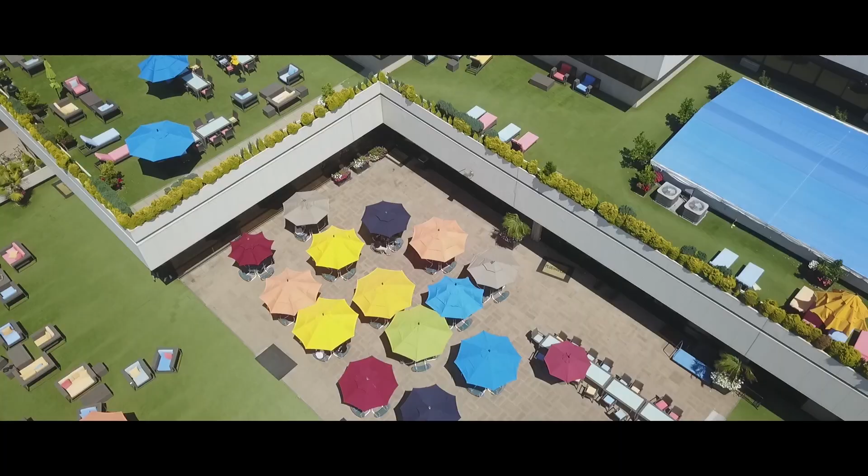All right, ladies and gentlemen, welcome to our Semiconductor Deep Tech Day. This is our second official semiconductor event here in our Silicon Valley office, after we started our semiconductor initiatives. Last time, in mid-March, we had Semiconductor Innovation Day, so I'm seeing so many familiar faces. My name is Ruzbe, and I'm leading semiconductor initiatives within Plug and Play, and it's really a pleasure seeing you, familiar faces as well as new faces.

This time, we are not just having startups. We have the pleasure of co-hosting our event with CEA and CEA Leti, and they are bringing their latest R&D technologies, as you can see around the room. So it's a great opportunity to know what's going to be the next generation of semiconductor R&D.

Just quickly going over the agenda - I know we are a bit behind schedule, but it's going to be fine. We are starting with a few minutes of introduction. We have a great keynote speaker, then we are going to our deep tech buckets. Each of these deep tech buckets includes an R&D presentation from CEA and CEA experts, then we are going to have some startups presenting on the same topics. And for each of them separately, we are having a great fireside chat in between the two deep tech buckets.

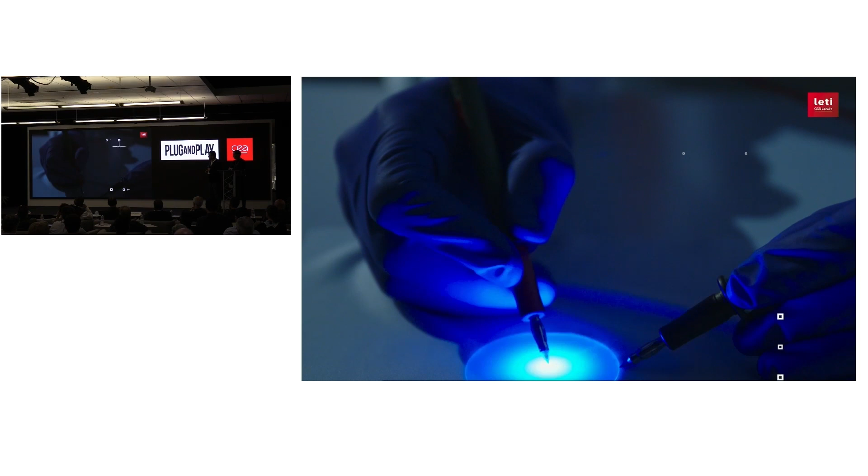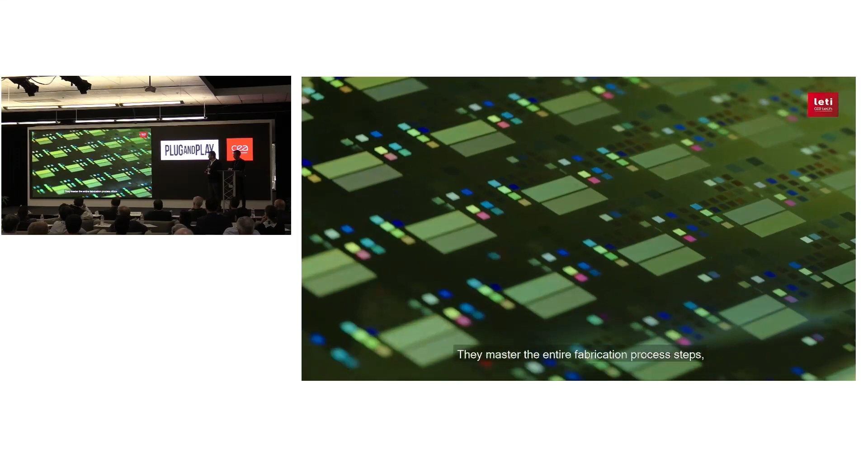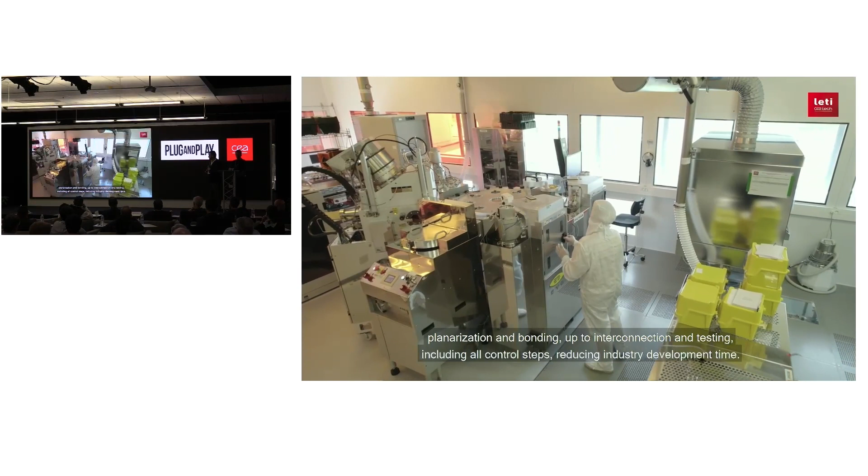CEA Leti experts leverage a full range of materials using 100mm up to 300mm silicon wafers. They master the entire fabrication process steps, from wafer processing, deposition, photolithography, etching, planarization, and bonding, up to interconnection and testing, including all control steps, reducing industry development time.

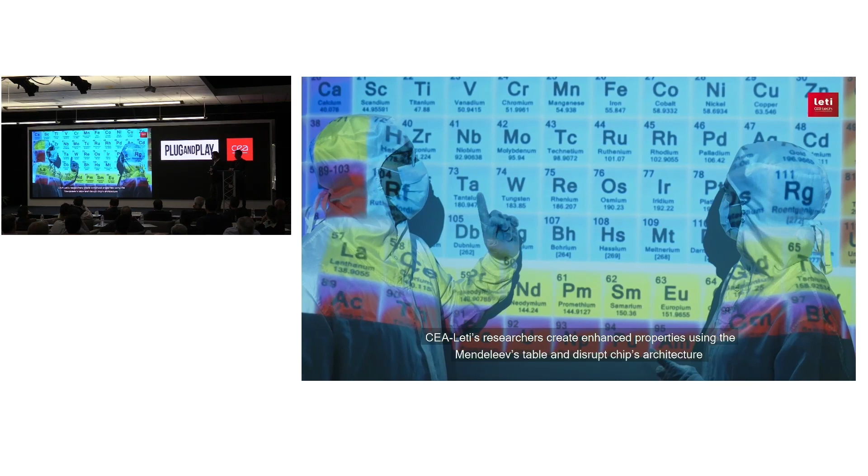CEA Leti's researchers create enhanced properties using the Mendeleev's table and disrupt chip architecture to offer unprecedented value in terms of miniaturization, energy consumption, speed, and frequency.

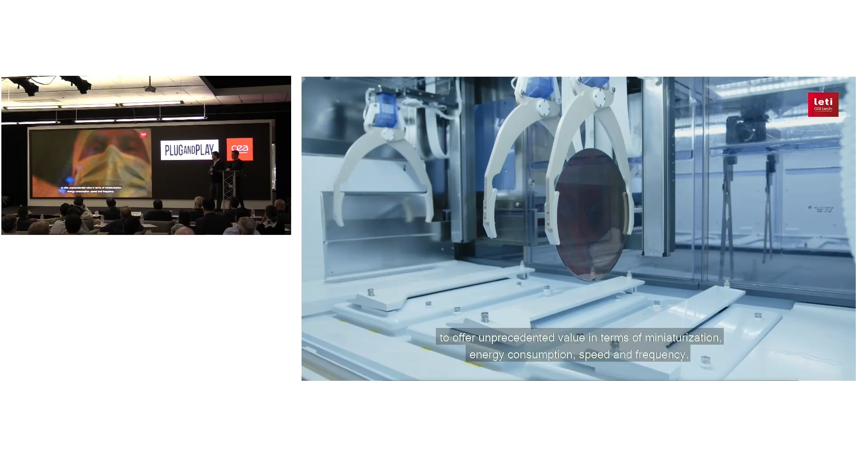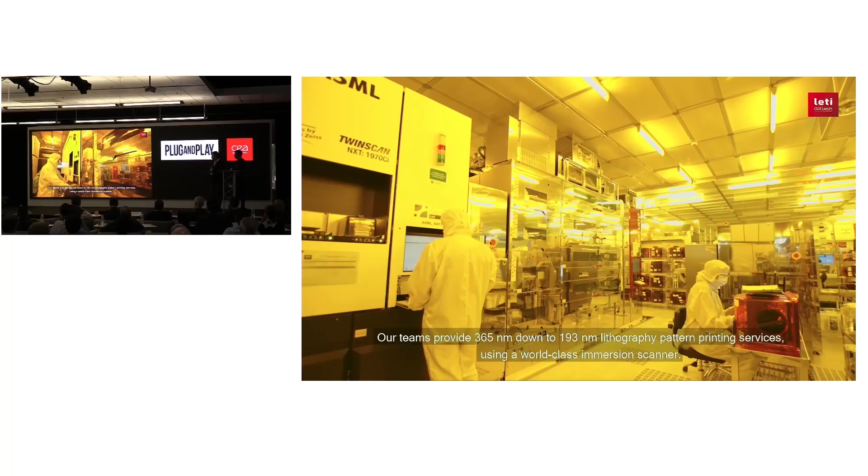Our teams provide 365 nanometer down to 193 nanometer lithography pattern printing services using a world-class immersion scanner. This equipment handles CEA Leti's partners' ever more complex pattern shapes and innovative material mix to achieve ultimate resolution and cut manufacturing costs.

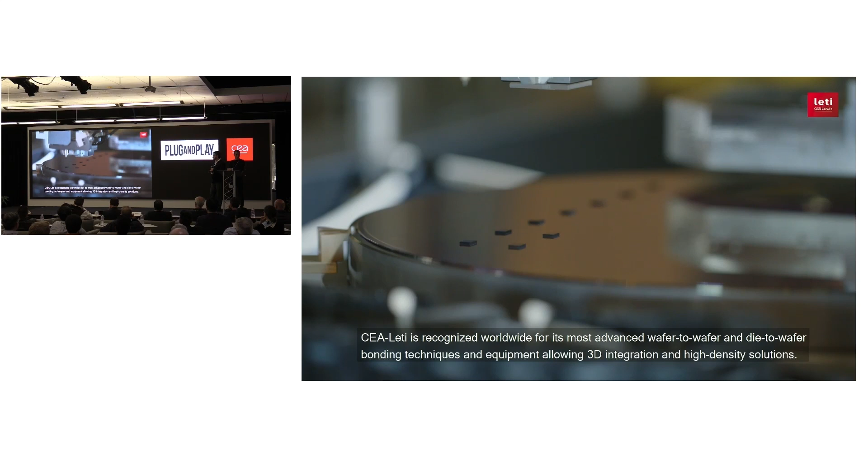CEA Leti is recognized worldwide for its most advanced wafer-to-wafer and die-to-wafer bonding techniques and equipment, allowing 3D integration and high-density solutions.

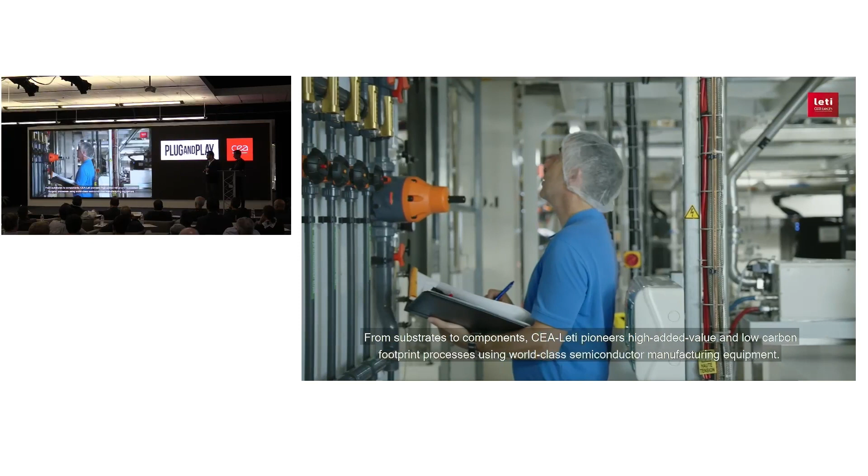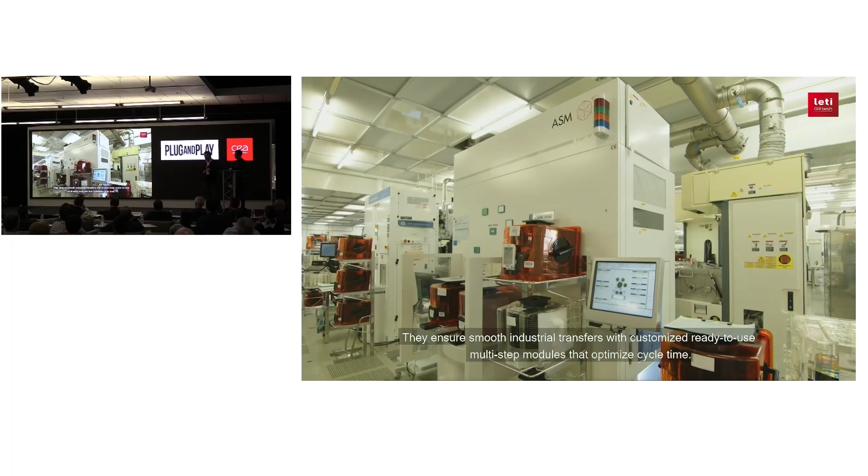From substrates to components, CEA Leti pioneers high added value and low carbon footprint processes using world-class semiconductor manufacturing equipment. To improve equipment's performance, our teams work hand in hand with suppliers. They ensure smooth industrial transfers with customized ready-to-use multi-step modules that optimize cycle time.

CEA Leti continues to install new equipment every year.

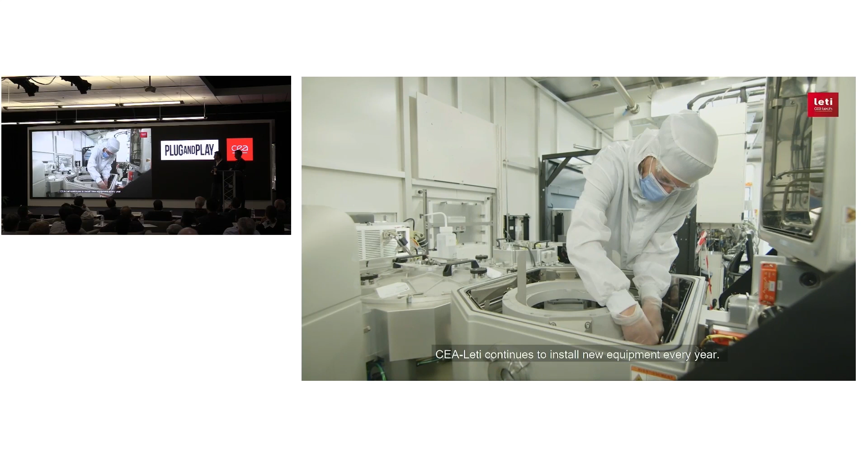CEA Leti builds on its scientific excellence to push the limits of miniaturization, leveraging both FD-SOI and gate-all-around technologies. Whether you are looking for computing, power electronics, sensing technologies, or radio frequencies, imagers, and display functions, CEA Leti delivers competitive solutions at various fabrication stages that meet industry high-volume manufacturing lines.

CEA Leti's teams turn ideas into disruptive products. Partner with us to fast-track your innovation project.

I just want to point out that when you use your smartphone, inside your smartphone, you have Leti inside, CEA Leti inside. 100% of your smartphones are based on RF-SOI, that's Leti. When you use your smartphone, your image sensors, there is Leti behind. When you use your smartphone with power management, this is again Leti. When you use an accelerometer in your smartphone, it's based on CEA Leti. So maybe you didn't know, but now you know that.

So do not hesitate to take time to discuss with the experts. And the first point, we have our huge event, our annual technical review, in Grenoble—I will say the French Silicon Valley—near our partners in Grenoble with ST, Soitec, and very soon with GF. So we have our annual review, so you are welcome the last day of June. So thanks a lot.

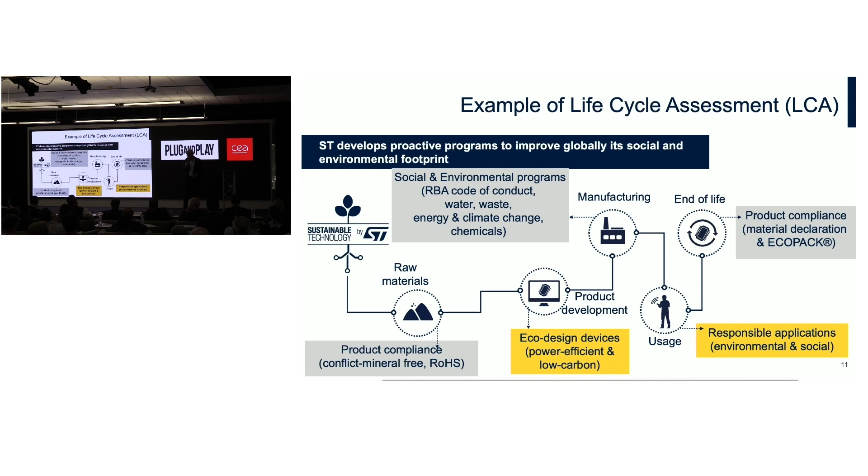Manufacturing side, again, it's about the electricity we consume, it's about the water we use, the raw materials that we use, where we're sourcing. But then we look at when we're putting something out, how is that used? How is it helping us in sustainability?

In energy consumption, 50% of the energy that we consume is industrial-based. The factories that we use to produce everything, it's a big consumer of electricity. If we can improve the efficiency there, it makes a big impact. And so that's why we're focused on this initiative.

So I want to talk about two areas that are quite simple but do have an impact. The first one is on electric motors. 70% of all industrial electrical energy is used to power electric motors. So of that 50% energy consumption, 70% is driving motors. We work on variable speed drives to improve the efficiency of motors, and that can create an improved use of energy savings.

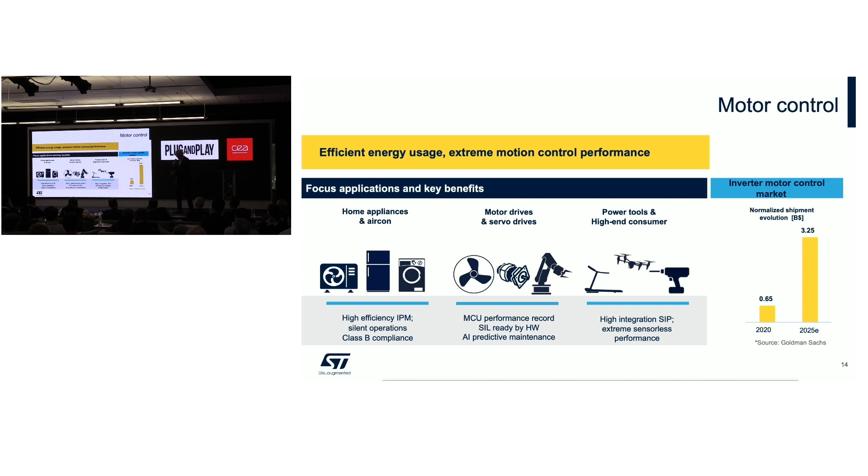Motors go into everything we have: home appliances, power tools, robotics, and you can see the market is growing rapidly in this space. Motor control, motor drives, growing rapidly. So if we can enable products in these applications, we're doing good for the environment.

One other area which is interesting is in power tools. In 2023, the forecast for power tools is 800 million units. Seems pretty large. Of those, professional use on tools is probably more than half. So we're looking at installing a MEMS unit that would improve the kickback on a drill. That kickback would then create energy saving. So we're looking in that, and basically in this application, if we were to work on just power drills, again, 360 tons of CO2 in 1 year. Small drop in the bucket, but if we think this way, I think we're going to make a big impact.

So semiconductors has an important role to play. ST is focused on smart mobility, power and energy, connected IoT. We're working on an efficient manufacturing footprint, but more important, we're powering our customers for sustainable innovation. So with that, thank you.

We can do questions. Please, Saeed. What is the biggest challenge you're working on? So the biggest challenge is the biggest market, or the biggest opportunity is always the biggest challenge.

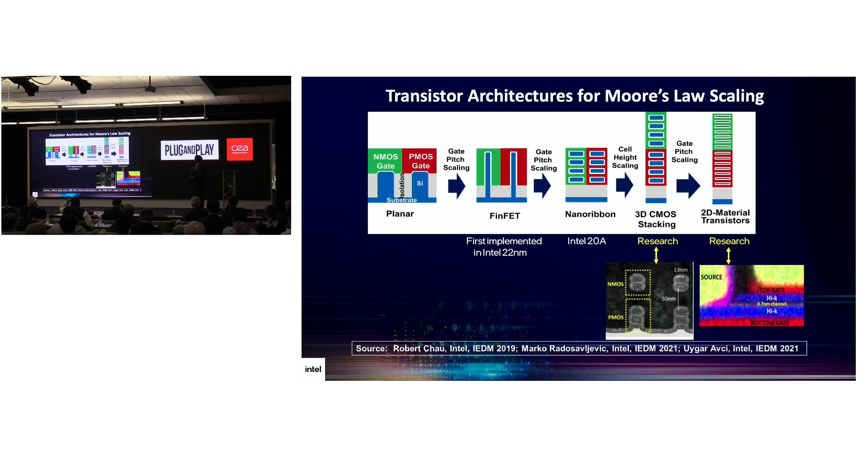We're also going beyond that, to fundamentally change from a silicon-based transistor to novel 2D-like materials. This is actually a presentation given by Robert at IEDM a couple of years ago, talking about some of the work we're doing in this area. That's on the front end - the transistor side.

On the packaging side, packaging is right now going through a huge inflection - I heard 100 different suppliers, thousands of different products - there's a big revolution going on. Some people call it chiplets, some call it 3D integration, heterogeneous integration, and the concept is instead of trying to make everything on a single chip, can I source it from many different companies, many different IPs, but eventually package them so they work as one monolithic chip. There are different ways to do it, and I'll talk about some programs we're working on with Leti on this front.

The holy grail is, can you actually do this in a commercially viable way? Because Moore's law has always been about putting everything into one IP block or one chip. If you split them into many different chips, can you actually do it? But if you can, it opens up a plethora of opportunities that people hadn't thought about - you could combine devices like gallium nitride and silicon on the same stack, which is not possible today. You cannot just make them on the same monolithic stack.

So those are some examples - there are products available in the market. One of the first entrants to this 3D integration is the CMOS image sensor, which is in pretty much all of our phones, where they put a combination of CMOS image, DRAM, and a logic driver and integrate all of them to drive very high performance rather than trying to build them in a monolithic way.

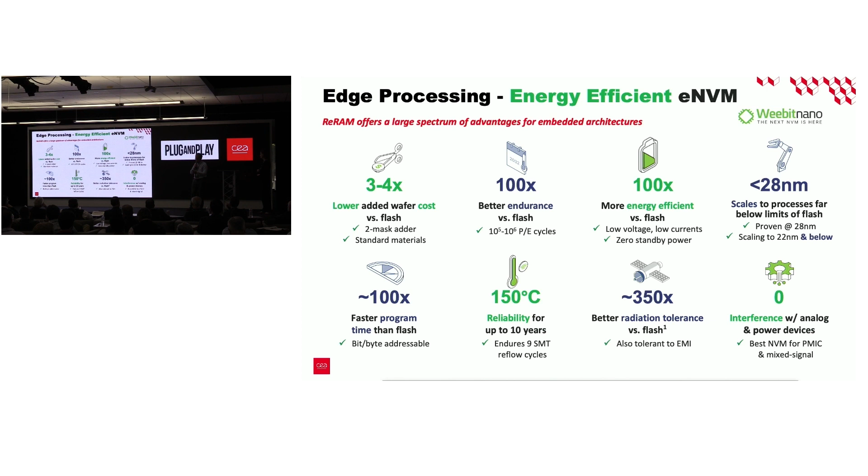Another topic I'd like to talk about, and François will explain much better than me, is this memory advanced demonstrator. This is a proof of concept platform we use at Leti for our internal development and research, because we're not only developing resistive RAM, but also PCM, ferroelectric RAM, and MRAM. This demonstrator integrates back-end-of-line non-volatile memory technologies on a classical, industrial CMOS-based wafer, which allows us and our partners to develop technologies and to prototype and make proof of concepts of their memory technologies.

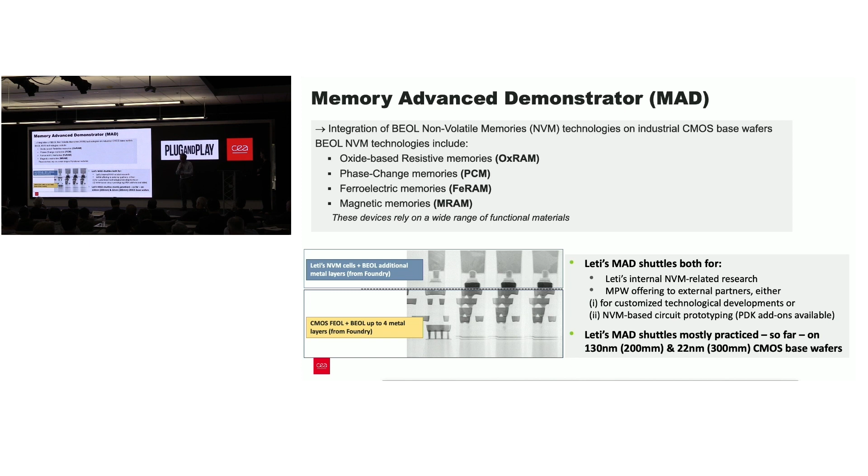Just to end with the memory topics, we have multidisciplinary teams in CEA, from device up to algorithms, and we put all that together in order to co-optimize design and technology. This is what we call DTCO, and we always have DTCO in mind when we develop our research.

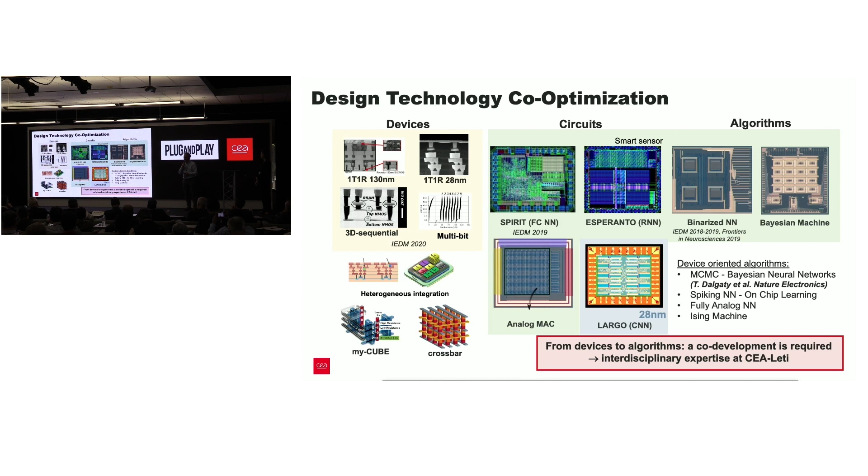Now I'll just talk a little about chiplets. If you want to learn more about chiplets, don't hesitate to go to my booth, on my left as well. I'll try to explain how chiplets can fill the gaps between the theoretical Moore's Law and the practical one, because with advanced technology nodes, we have difficulties shrinking some parts of the chip, like analog parts. Chiplets could be a good solution, replacing a monolithic die with several smaller dies called chiplets. I'll try to explain how it can ease time to market and cost-effective development, lowering manufacturing costs with really good flexibility.

According to a presentation done during the chiplet symposium here in January, chiplets could represent around 20% of the semiconductor market share in 2027. So that's something quite important now, especially in the HPC world, high performance computing.

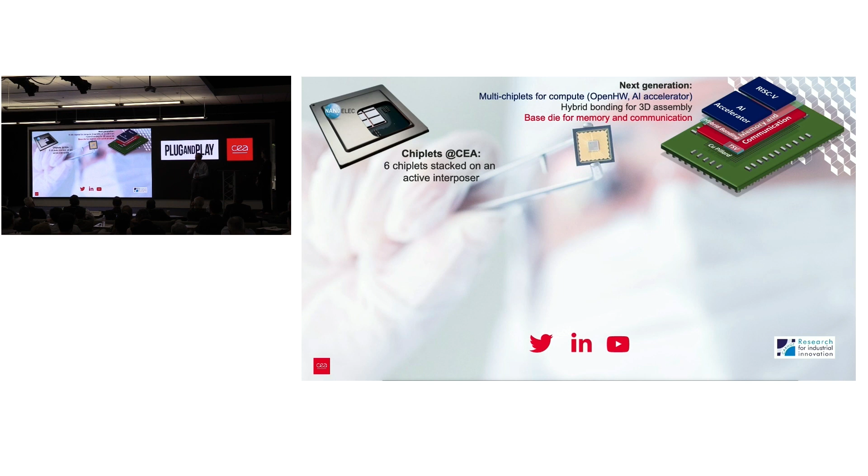I can give you more details on what we've done, the solution we've chosen for chiplet design, and our vision for the next generation, showing that we have a complete offer, as I said, for memory, from the system down to the technology. And always on my right, don't hesitate to visit the booth from Aurélie.

Without any 3D integration, we wouldn't have any chiplets. So it's really important to understand what we're developing in terms of 3D integration technology, from TSV to propagate signals from top to upper levels for routing, in order to find the different IOs, connecting and assembly, what we use in terms of connection between several tiers or layers of 3D integration, and everything related to rebuild and sealing.

And all these technologies is not just, let's say, a toolbox development.

This is also demonstrators. We also exercise this technology on demonstrators. We've made a first demonstrator called Intact. This is an active interposer on which we have stacked six chiplets. This demonstrator is now finished. So we have learned lots with these demonstrators on the technology side, but also on the design side.

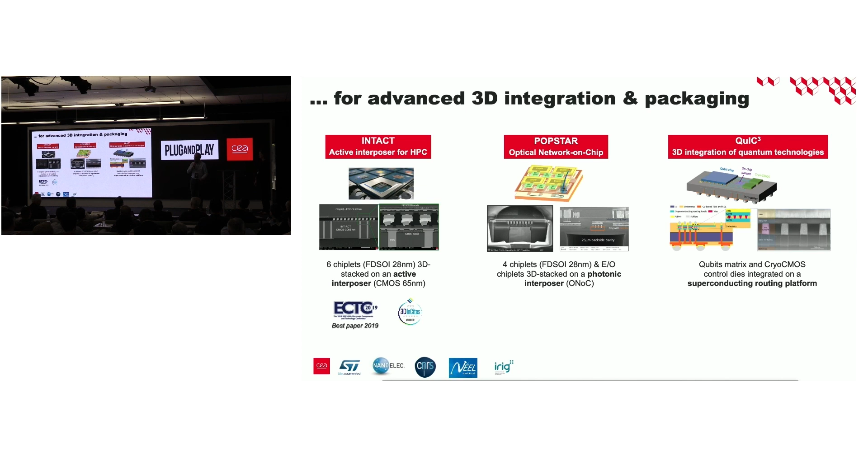So once again, don't hesitate to visit the booth on my right to learn more about all these technologies.

Thank you, Denis. I will follow up with another topic about data communications. Here I will introduce two sets of technologies: one around silicon photonics, and one around radio frequency technologies. The booths are in the corner, so do not hesitate to visit us. Eric for radio frequency and Hai for silicon photonics.

You, better than others, probably know how there is a huge demand for high-performance communications, large bandwidth, low latency, low power, because nowadays it's more and more important to have a look at the power consumption of our technologies.

So at CEA-Leti, as it was introduced just before, we have our own platforms for developing our innovative technologies. So we have one 12-inch platform for silicon photonics. This is a very state-of-the-art platform with immersion lithography, with a small CD going down to 60 nanometer.

And on this platform, we have different, really nice tools that we develop through joint collaborations with equipment manufacturers. So we have a set of possibilities, including nano-imprint lithography, grayscale lithography, and so the sky is almost our limit in terms of lithography.

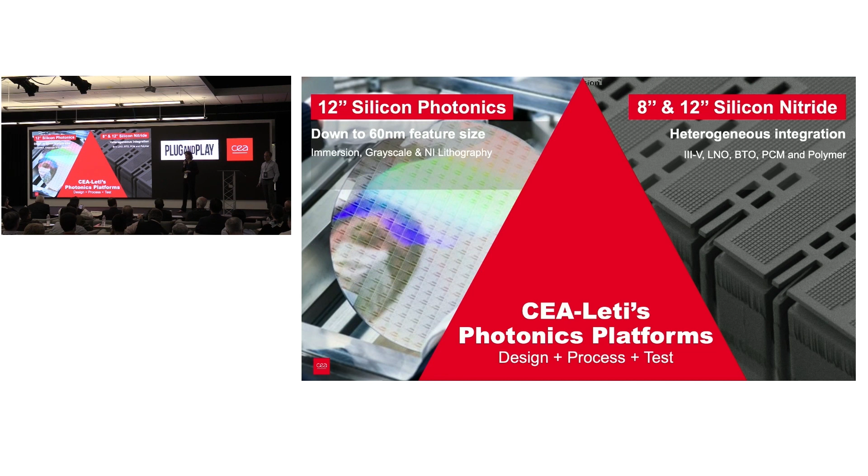But we don't stop when we have an idea and make the first prototypes. Our aim is really to transfer those innovations into the industry, to you, the startups, the big players.

And here we have an illustration of Scintil Photonics, a spin-off of CEA created 4 years ago. They have developed a very nice solution for datacom, based on III-V on silicon integration, to really integrate easily and in a scalable way lasers and modulators.

So they made a demonstration one month ago at OFC. Maybe you were at OFC and saw the demo. They showed their first generation of DFB laser array, 4 wavelengths combined on chip, with 100 gigahertz spacing.

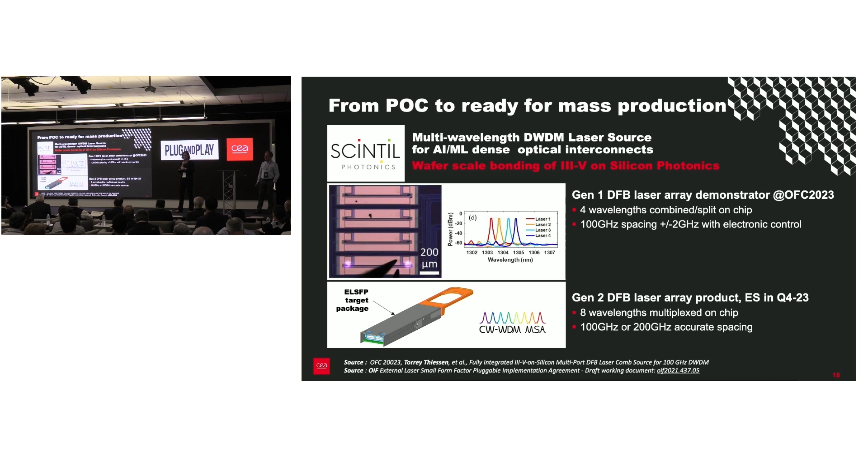And they have also shown their first DFB laser array product with 8 wavelengths. They showed the simulation, and it's now into production, into prototype pilot line these days. So it will be demoed at the end of the year.

And you had a brief overview before of the nice 3D technologies that we can use in our solutions. So for silicon photonics, we developed TSV, but for photonics - through silicon via for photonics - in order to enable this nice optical network on chip architecture.

This architecture is being finalized those days, based on chiplets from ST, 28 nanometer FDSOI, that are then packaged with an active silicon photonics interposer. As mentioned by Denis, it's very important to take into account from the beginning the co-design with the electronics. And so we have real demos ongoing to show you.

And last but not least, about developing solutions based on silicon photonics, you need also the right test equipment to measure the good performances of your solutions. So we have best-in-class testing equipment with more than 6 wafer probers in-house. This year we will have the ability to ramp to a bandwidth measurement up to 110 gigahertz. And next year we have equipment coming in for bit error rate and eye diagram measurement up to 128 gigabaud. So we have all the tools from design to prototyping to equipment to develop the latest innovative silicon photonics solutions.

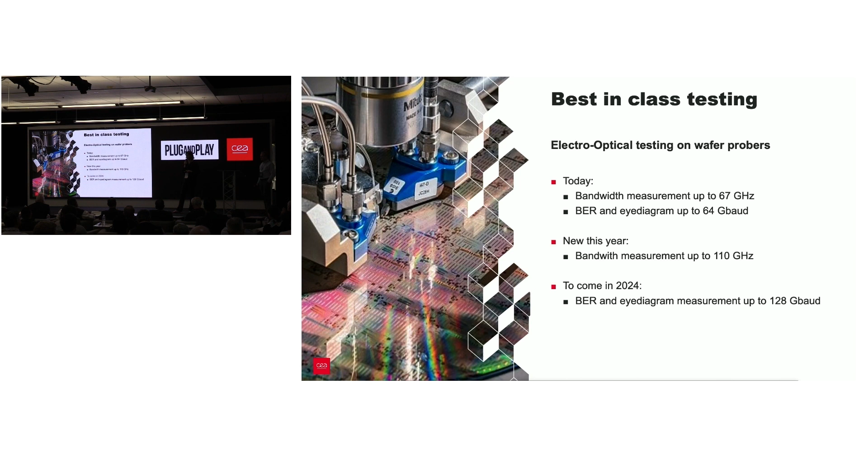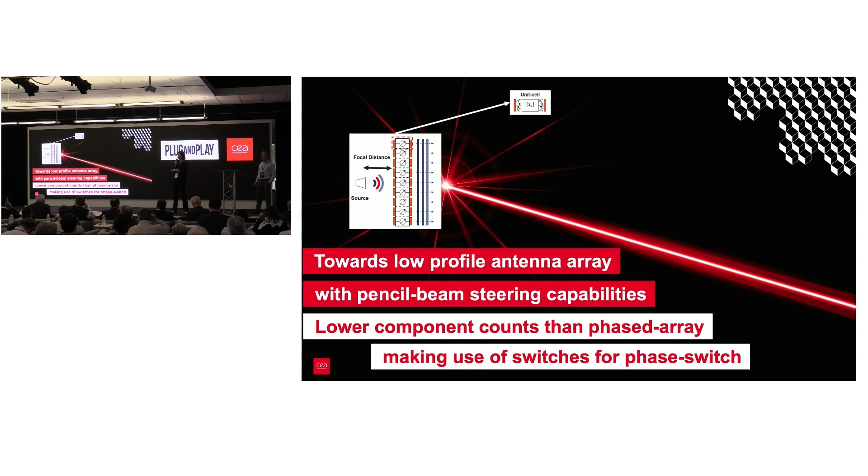Then you have a set of diodes, switches, low-cost components. So you have a very low-cost solution, and you have very good compactness in the solution. So you can come to our booth, see Eric, to have details on this lensed array.

Then you may need also point-to-point communications for the D band. Here we have developed a channel bonding-based solution, which is much better from our point of view than wideband solutions. So you can reach high data rates. Here you see an example of 8 channels. On the top it's 16 QAM, but on the bottom you see a 64 QAM configuration, and you have more than 10 gigabit per second per channel. So meaning for 16 channels you get more than 150 gigabit per second bandwidth. And this solution also has very low power consumption, as we reach only 20 picojoule per bit consumption.

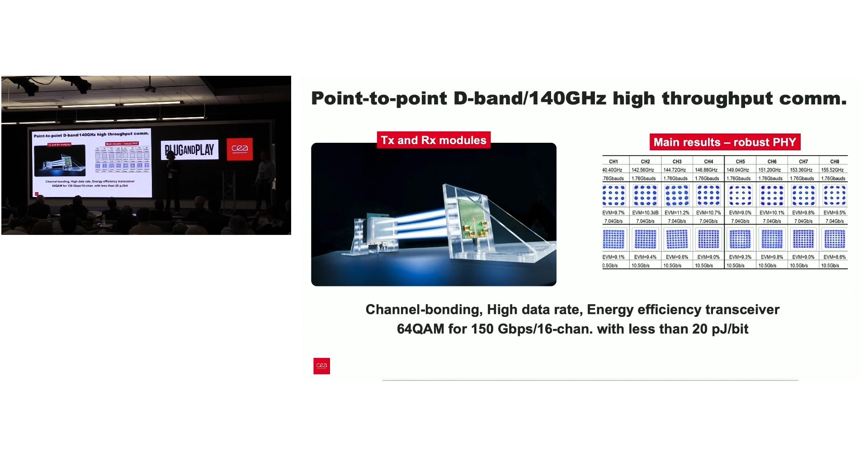So you have a demo on the booth. If you want to see it for real, come to the booth.

So this is a very powerful technology. And if you associate this technology together with GaN, you can have even higher power modules. So you have a complete set of materials available to reach frequency range 1 or FR2 range, with frequencies going up to 60 gigahertz, but we've even shown that it can reach 100 gigahertz. So it's a very efficient technology compared to GaAs in the sense of having more functionalities embedded into this RF-SOI technology.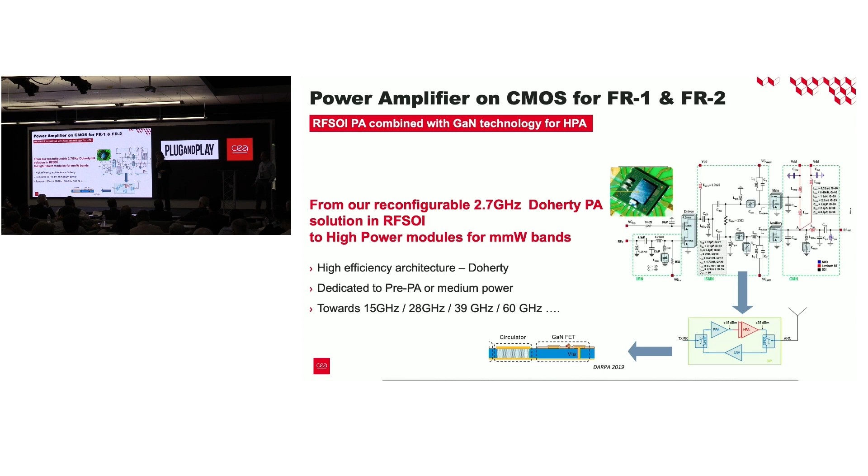To summarize, regarding radio frequencies, our aim at CEA is really to break the sub-terahertz frontiers. We have developed CMOS technologies that are off the shelf. You can come to see us. We can customize the solutions for your specific need, but we have solutions in hand already. So thank you for your attention.

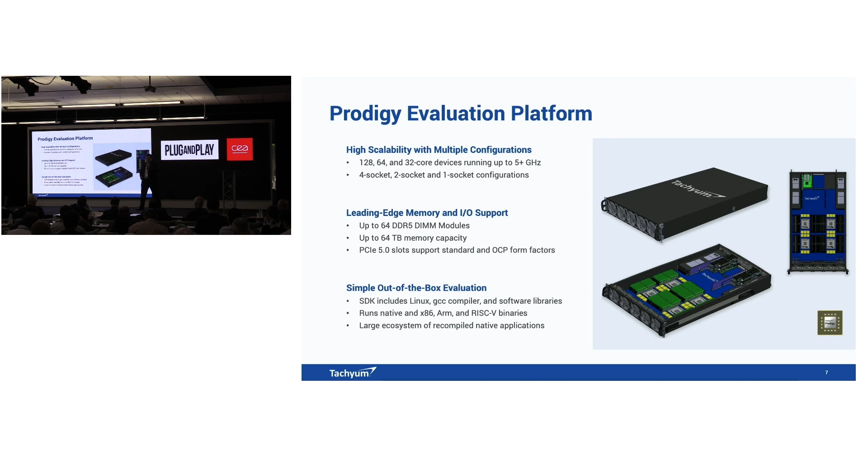Funding status: currently in the middle of raising Series C. I want to thank you for your time, and thanks to Plug and Play for the opportunity.

For presenting Tachyum. For the last startup in this section, we have Numem. Numem develops advanced non-volatile memory solutions based on MRAM. Their solution offers high density, low latency, and low power consumption, making it applicable for many applications, including edge devices and data centers. Please welcome Jack, one of our French entrepreneurs in residence, on the stage.

Thank you. Formerly French, yes. Hi, a lot of familiar faces in the audience. Good to see all of you, and thanks Plug and Play for the opportunity. We've been with Plug and Play since inception and been able to use a flexible model and events like this, as well as all the amenities. So appreciative of this opportunity.

As you've heard multiple times today, AI is a big driver revolutionizing everything, and clearly a huge market for semiconductors, north of $100 billion expected in 2028. What's important also is that it's not just a play at the data center, but more and more edge nodes are getting intelligence, driving to add intelligence into edge nodes at a faster pace than the edge nodes are growing, with an expectation of 2.6 billion units in 2025.

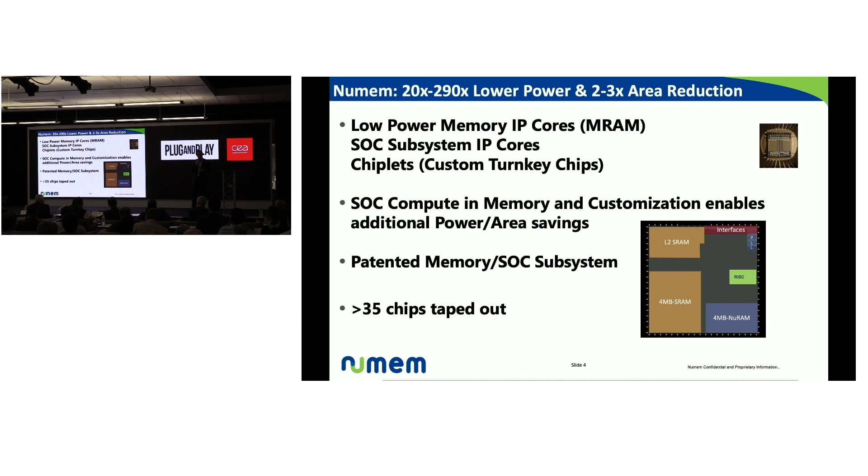We've taped out to date 35 different chip variants, so we have a lot of experience in getting chips out. Snapshot of our product: we have our memory array, which is based on MRAM, but we also have more and more SoC functions built in support of the memory or in support of compute.

For memory management and control, built-in self-tests, which can be adaptive. Performance and endurance engine - as you've seen earlier in a presentation, resistive RAMs have traditionally lower endurance, much lower than SRAM, and we're able, with a very small circuitry, to improve the endurance by over 100x, at the same time improving the average performance by about 5x.

And then we have compute functions, which are not intended to replace the entire AI accelerators, but as an assist, enabling a reduction of the data transfer between the memory and the SoC. So that's in a snapshot what we have inside our subsystem, but we are also now decoupling some of those functions that can work along with other memory IPs, in different flavors, be it RRAM, PCRAM, or even FERAM.

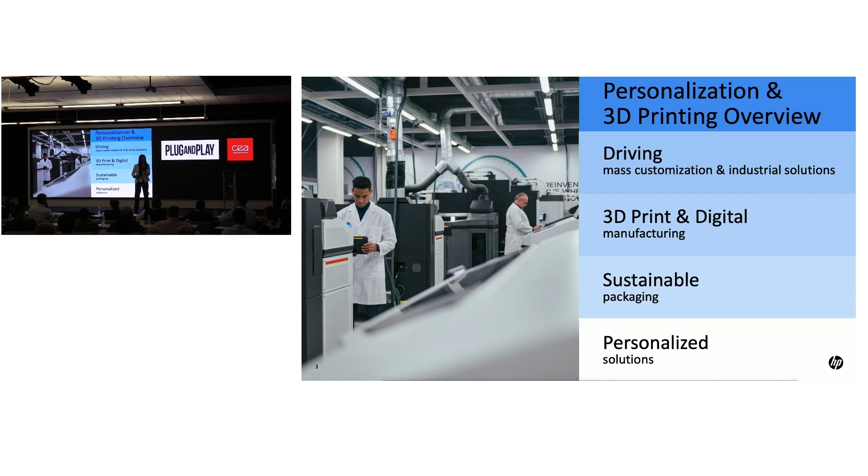And obviously 3D printing - one of the biggest advantages is making personalization happen. A great example, I think a lot of people know, is dentistry - the clear aligner to correct our teeth, right? That is solely built and based on 3D printing because every single treatment is different.

So here are some of the portfolios we have, and we definitely had a lot of work going through this. But this is our current portfolio - it's called Multi-Jet Fusion technology with our polymers, and of course Metal Jet for making metal devices.

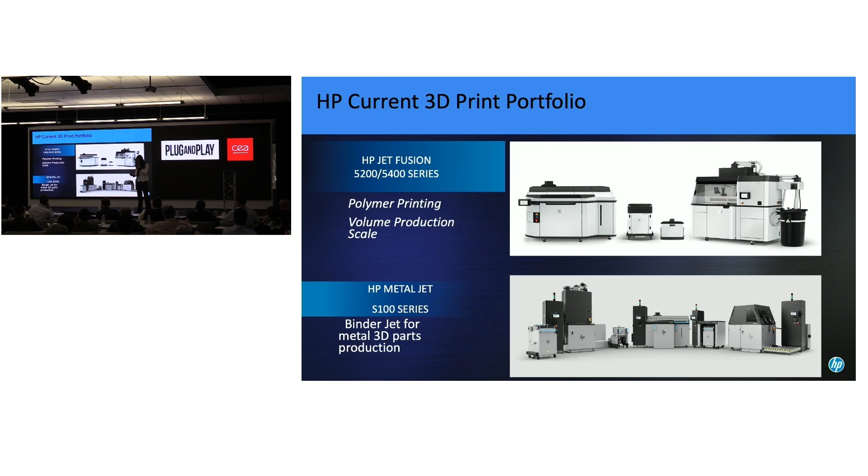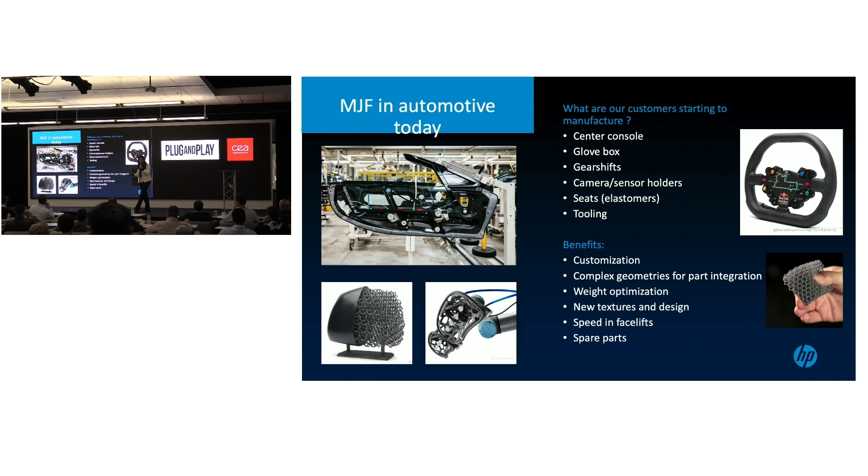So one of the things is, where are these things being used, right? Examples are, I just gave dentistry, and these are even in automotive. Today many devices have started utilizing this technology to build customized and personalized devices in vehicles.

As we continued working on this, we had a question - particularly for us, is that today we're making all these devices as static ones. Can we integrate functions from the get-go? So we had this question in our mind.

Can we actually integrate those sensors and electronic devices from the get-go? Similar to robotics, a lot of these are starting to have - and one of the problems we keep hearing - is lots of wires going everywhere, right? So how can we actually have those devices made from the get-go with limited wires?

With all these questions in mind, this is where we actually started talking to CEA back in 2017, okay? A couple of challenges we learned - all current prototyping and manufacturing processes for electrical, mechanical devices or assemblies have inherent design limitations that prevent engineers from exploring the full 3D space.

Antenna is one example, which we learned a lot about from CEA in the earlier days. And also, this is an interesting quote - our engineers are used to working in 3D, but not our electrical teams. This will be a new way of designing. These are the challenges, and at the same time, also opportunities.

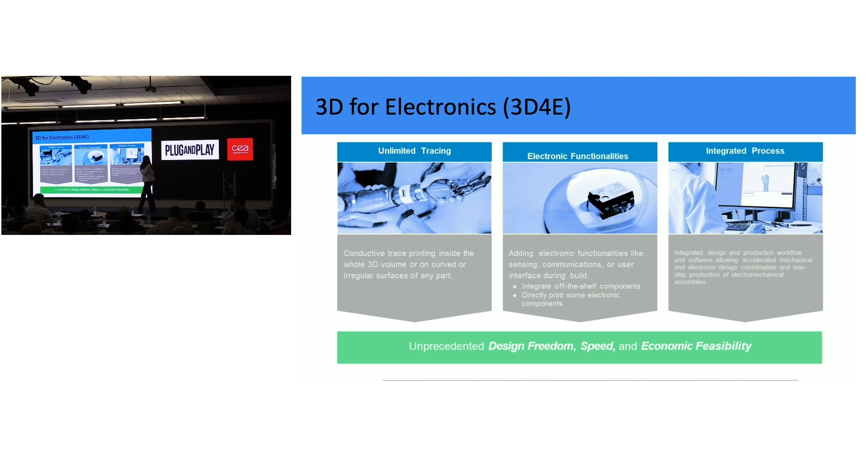That's one of the questions that gives us the opportunity to leverage 3D space from the get-go. And of course, electronic functionalities - can we integrate sensors and communication devices into user interfaces? One of the things we talk about is not only building those devices from scratch, but integrating them in 3D, which is also a big challenge. And what would the integrated process look like?

So when we look at this, what is the underlying technology? We basically created a general multi-jet fusion technology, the powder-based one. We put in not only plastic or polymer materials, but electronic agents to help us build those electronic functions.

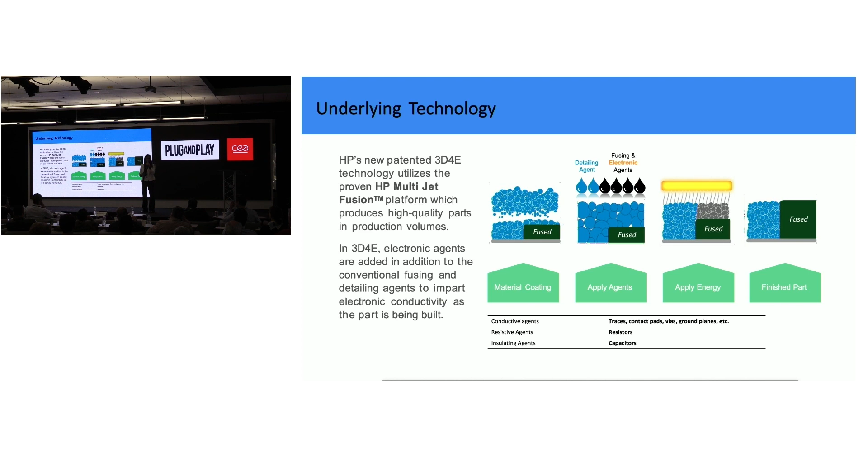At the early stage, we worked with CEA to build this up to proof of concept. This is very important - it's easy to have hundreds of different ideas, but this is where we can really start to benefit and build.

One of the things we worked on is these unique application devices. The middle one really came during the early pandemic time - combining sensing and communication, we print 2.5D and 3D antennas inside these parts, and we place the chips and sensors. Later stage, we built an air pressure sensor device.

That went into ventilator systems. And of course the other part is how fine a feature we can actually continue building into the devices - this is one of the integrated electromechanical devices.

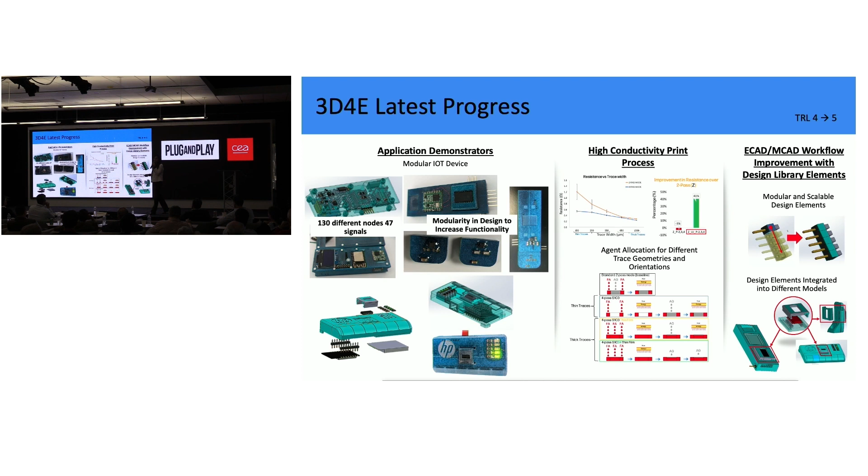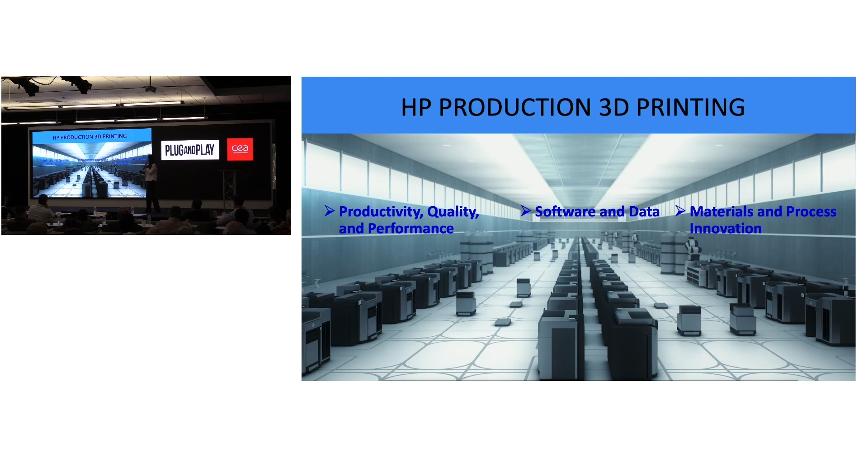Last but not least is this workflow - ECAD and MCAD, how they actually integrate and work together. For 3D to really make a difference in this field, it's very important to understand this is not a one-step, two-step process. Productivity, quality, performance, software and data, materials and process innovation all need to continue happening.

This is really just the dream we're building toward - it's not there yet today. Across all these fields, we continue working with CEA as our key collaborators. The most recent work is on digital twins to improve our productivity.

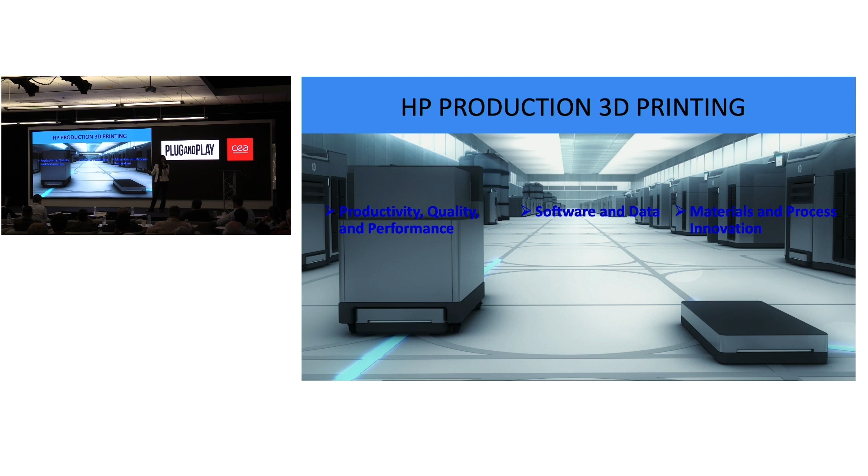Of course, materials innovation has always been front and center for all technology to move forward. With that, thank you very much.

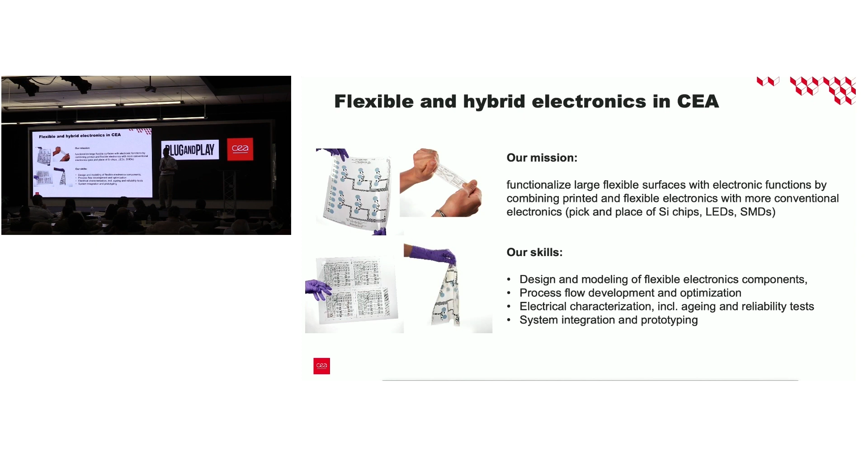This happens in a clean room, the same kind of clean room where you would do microelectronics. The typical substrate is a square format, not a round object. Its size is comparable to a 300 millimeter wafer, and it involves the usual equipment for printing and coating, thermoforming to get the shapes, and back-end equipment.

The nice thing is the substrate can be pretty much anything—glass, metal, stretchable plastic, paper. Paper is a very interesting substrate, enabling environmentally friendly devices.

So what we've done so far is a large portfolio of printed devices, ranging from very simple systems at the beginning—capacitive touchscreen, conductive tracks. The obvious case, for example in a car, is when you need to lay out traces of a signal on a bumper.

Antennas, of course, all kinds of electrodes, which are nice because when you want to connect with the human body, you don't want a flat, solid electrode—you want something conformable. Also measuring units: strain gauge, pressure sensor, humidity and temperature sensor.

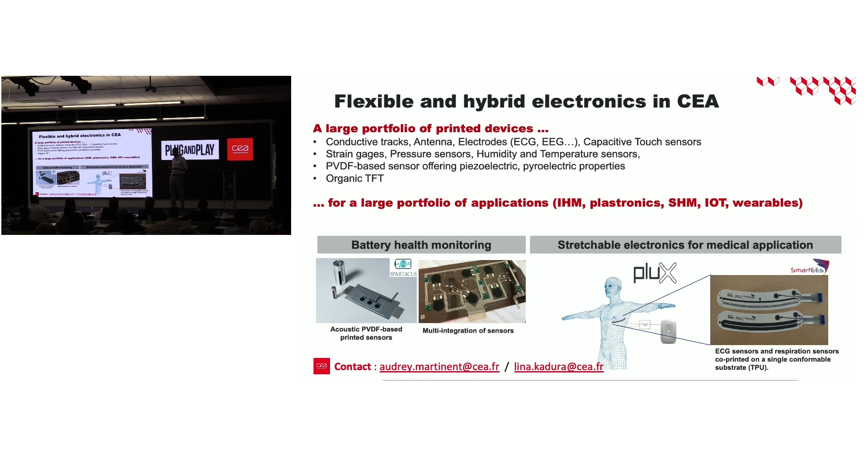Let me end this series of presentations with another type of sensor, the one we call MEMS and NEMS. These are actually closer to the world of the silicon chip. Leti has been one of the pioneers of MEMS and NEMS since the 1980s, and we haven't stopped investing in MEMS since then. We have a number of world firsts in the MEMS world, and I'm going to give you some examples.

Historically speaking, it started in 1980. The first mass market MEMS was the capacitive comb-driven detection invented by Leti—a capacitive sensor. The way you measure the physical phenomenon you want to measure is through a change in capacitance.

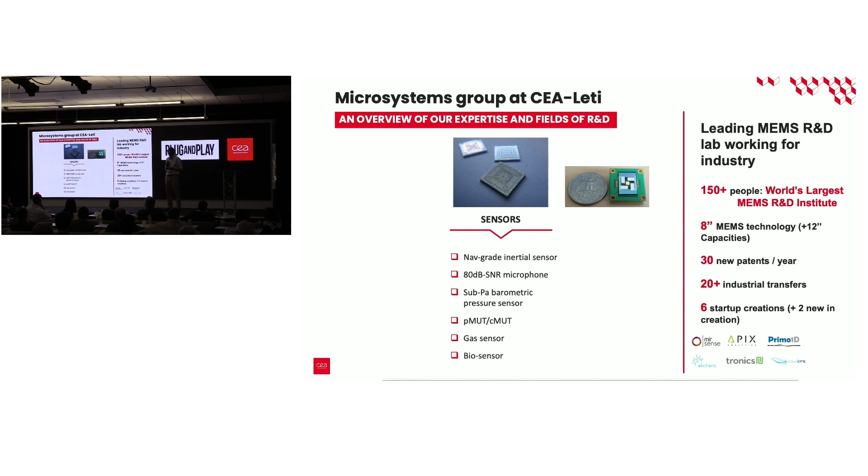So modeling, fabrication, testing of sensors and actuators is what we do at the MEMS lab. And this translates into objects that go from haptics—changing your interaction. For example, having a glass panel and making it feel like it's wood or like it's sand. So we know how to do that.

Micro mirrors, microphones, ultrasound, piezo, micro speakers, and inertial sensors—there's a whole bunch of possibilities. So again, please come and talk to us.

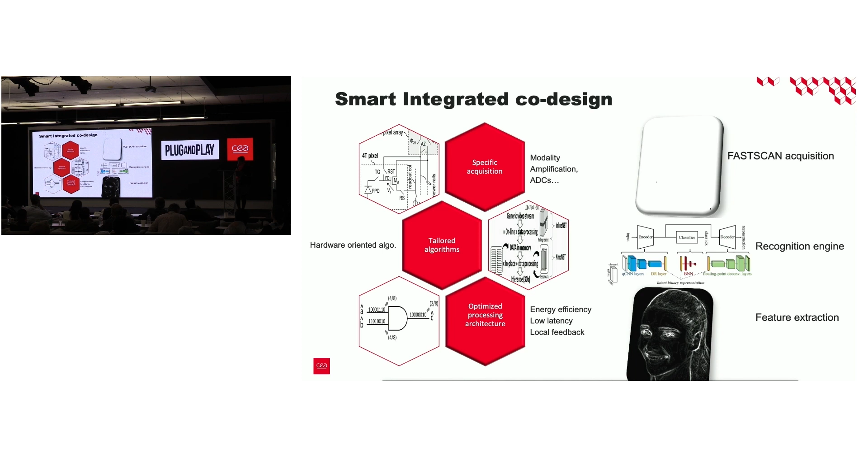Another thing that makes us unique is that we are very used to integrate processes, whether from CEA or from other technology labs, and take them as boosting opportunities. I'll give you 4 examples.

The first one on the upper left is SEEL. Thanks to a dedicated ADC and a programmable processor array, the smart thermal infrared imager SEEL is able to perform various tasks, such as people localization and counting, in just 1 milliwatt. That's 10 to 100 times less than the competition. This circuit is being transferred to a startup.

The second example on the upper right is µWAI, which stands for Microwatt Artificial Intelligence, and it reaches 5 microwatt operation, thanks to the combination of fast scan, a bit plane reading acquisition mode, along with dimensionality reduction and compact inference circuits. It also allows both an autonomous operation and more than 95% object recognition. This technology has been transferred to ST Microelectronics, and there are still opportunities for collaboration, so maybe with one of you.

The third example on the bottom left is about the implementation of complex neural networks. I said I was going to come back to that. So we have designed a chip featuring in-memory computing. It has shown the possibility of implementing a 2-stage neural network architecture for only 150 microwatt with an F1 score superior to 0.9.

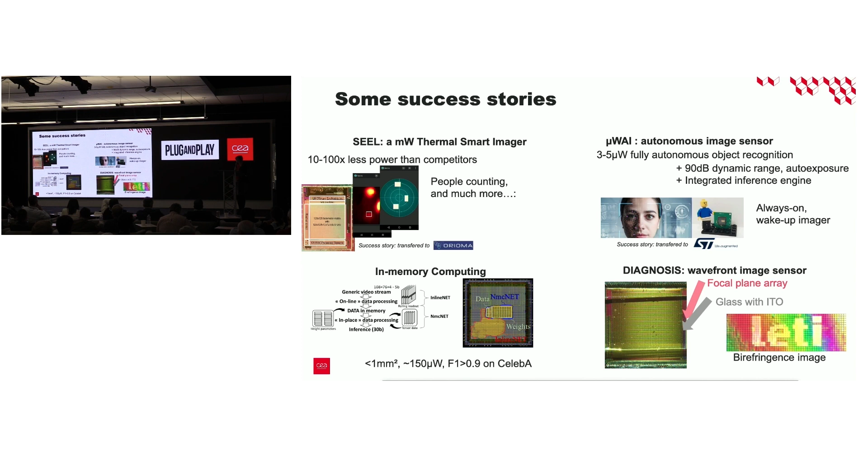Now, moving to displays. Display technology is another key component of the development chain at CEA.

CEA is leading the way in gallium nitride-based micro-LED technology for the next generation display components, from the very tiny, think smart glasses, to the very big. So micro-LED is a direct light emission technology, thus potentially much more efficient than the currently ubiquitous LCD technology, which is based on backlights that are always on.

So we work on 4, 6, and 8-inch substrates, and we also have a roadmap towards 12-inch. So from smart lighting to automotive and virtual or augmented reality displays, our R&D spans material, processes, devices, and systems to bring our partners more pixels, higher quality images, and new features like transparent interactive displays.

So again, what makes us unique? Well, our experience of integration onto driving backplanes spans many years. And we work with all types of micro-LED and CMOS integration. We can do die-to-wafer hybridization with microtubes with alignment, and here the feasibility down to 10 micron pitch was shown.

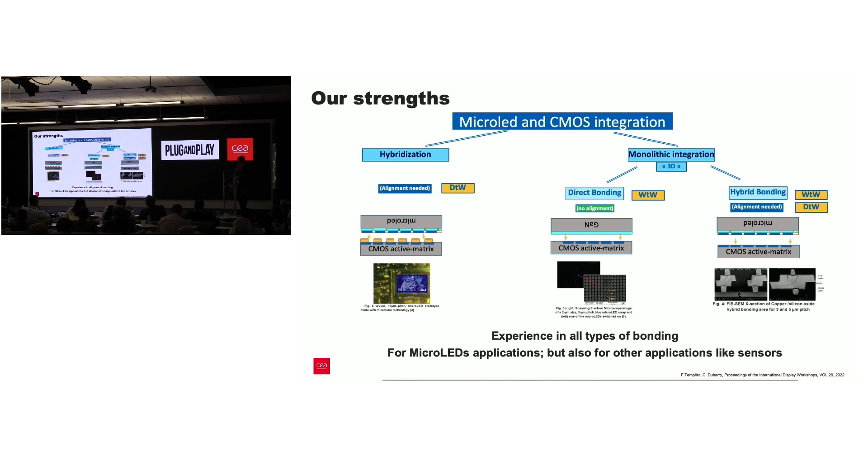We invented a direct metal bonding method, wafer to wafer, and with this approach we do not need to use alignment. The feasibility down to 1 micron pitch was demonstrated. And finally, we also work on hybrid bonding, die-to-wafer and wafer-to-wafer, with alignment, where feasibility down to 3 micron pitch was shown. Let me give you 2 success stories on those display technologies.

So think again about that and ask yourself what could be the benefit of those technologies for your applications.

And now I ask you to kind of switch scale and switch gear, and we're going to talk about energy. So we're going to leave the micro scale and the component scale of microelectronics and consider the system size. And by system, I mean think the big data center, think the factory that manufactures those chips. John Rossi from ST Microelectronics made a great introduction on energy, so let's dive into it.

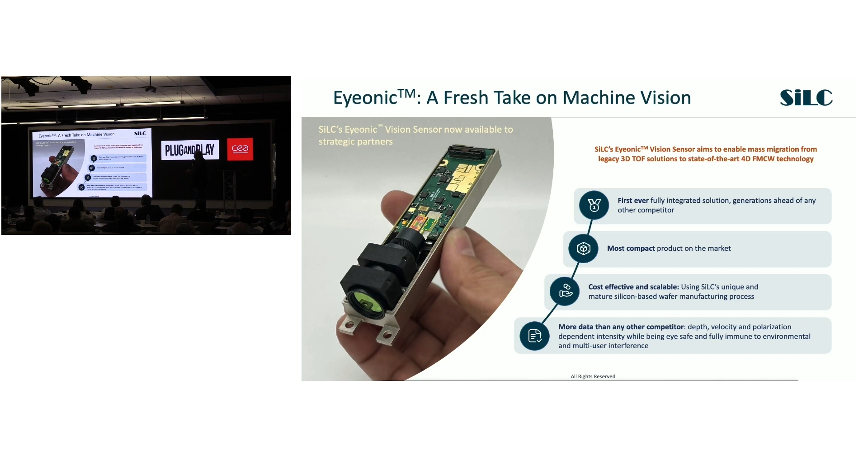So this product is available. You can actually buy it today. And this enables us to play across multiple markets.

Another comparison I want to show is something we demonstrated at CES—the long-range demo, about 500 meters. So I went from a few meters to 500 meters with the same technology.

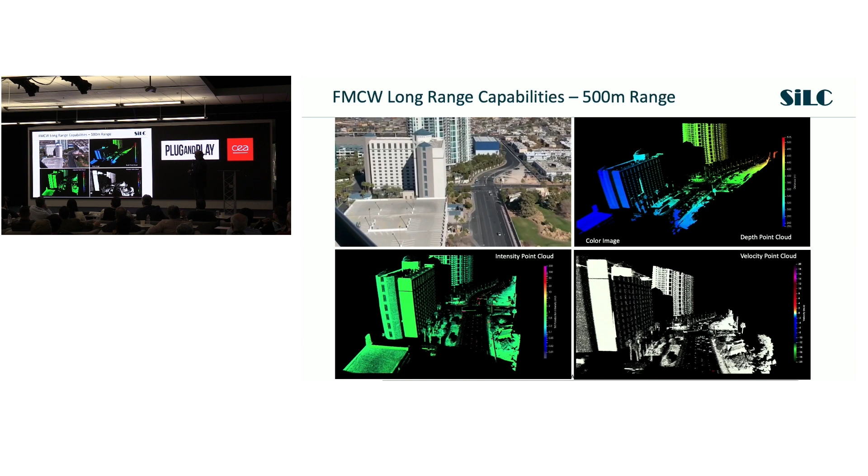Here we are showing a junction at about 500 meters, shooting at it from a balcony outside our suite. You can see the images we get at about 500 meters. Now, that's not the limit.

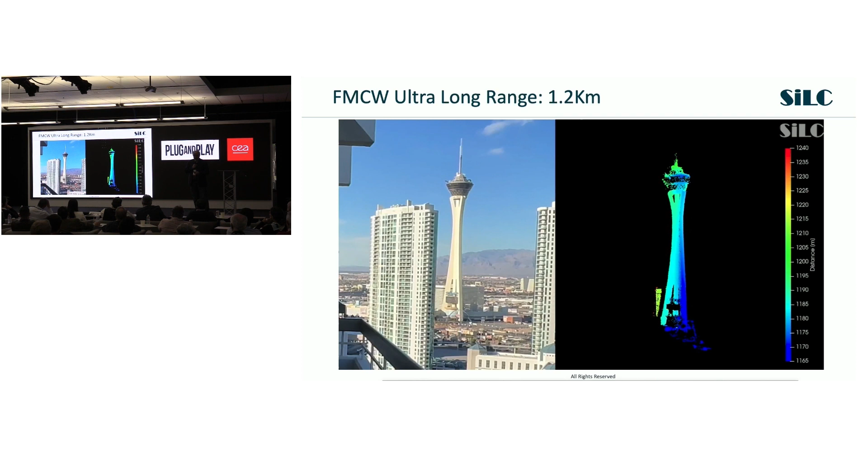We can actually show you a kilometer, over 1.2 kilometers, with the same system. It's very unlikely for anyone to achieve this level of technology unless they have access to the kind of integration platform that we have. Remember, this is all done with a tiny, fully integrated chip.

I want to end my presentation here by just re-showing the summary slide, and I'm open to any questions.

That's a great question. We are very active at the moment in warehouse automation, robotics, and industrial applications, replacing human workers that don't exist, basically.

Any other question from the audience?

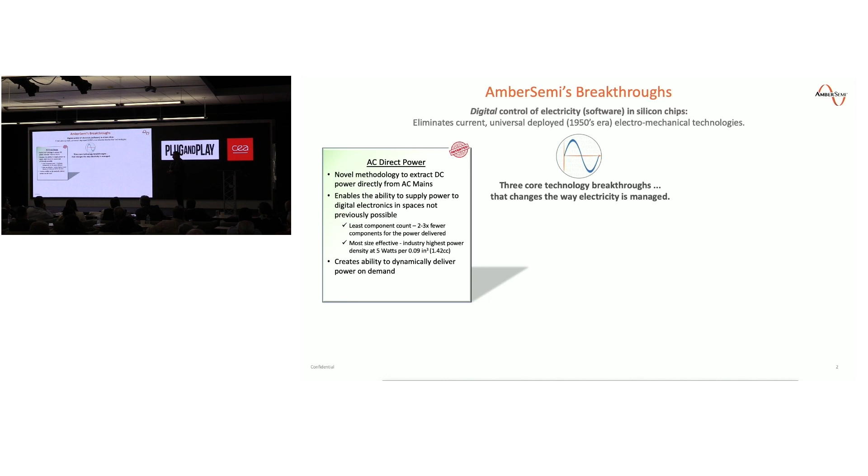So our first breakthrough in this case, we came up with a way to extract DC directly from AC mains by eliminating electrolytics, magnetics, rectifier bridges, everything else, through a tiny chip. We eliminated what you're all familiar with in so many different products, which is the brick. We eliminated the brick with a solid state solution.

Our solution can be used in many applications, in different products. It can be in IoT. It can be a household power supply for other applications. So with that breakthrough, I had no intention of monetizing this because we built it for the purpose of a housekeeping power supply for our two fundamental core breakthroughs.

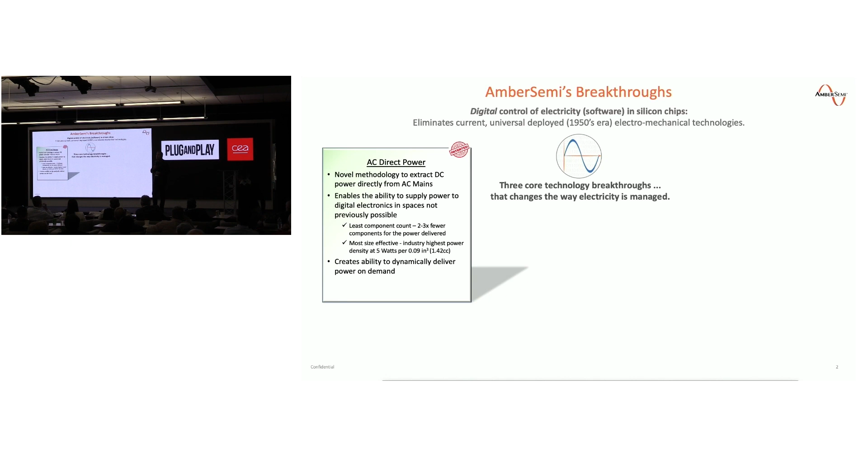One of them is AC sensing. We found a way that we can actually sense, on both sides of our silicon, the line and the load—inductive load, surge, overcurrent, overvoltage, short circuit, it doesn't matter. But what are you going to do when you're sensing if you can't switch fast enough? You're going to be at the mercy of electromechanical technologies and their speed to trip.

Therefore, we came up with a new architecture again, in driving something like MOSFETs, silicon carbides, GaN, MEMS, in a way where we can be a circuit breaker, a motor control, an outlet, switches, circuit, GFCI—it doesn't matter. Anything replacing a relay, a 50-cent relay, it doesn't matter at the end of the day. It's AC switching through a solid state solution.

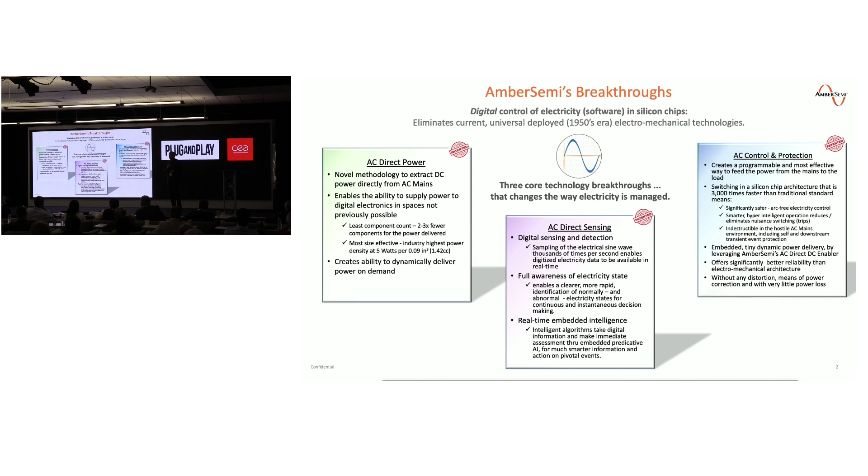So when you see that there's a solution 3,000 times faster, that's because when we're sitting and waiting to see an event, we can recognize if that event is real, or if it's just a brand new refrigerator that I'm not familiar with. By the time I trip to the time I actually open, it takes about 5 cycles. In our case, we can sit and wait to see if it's going to repeat itself, and if it does, then yes, we will trip and open up—and we're still faster.

This is our first demo. When we built the company, before we did any financing, we came up with this particular tiny board, eliminating the brick that I just showed you.

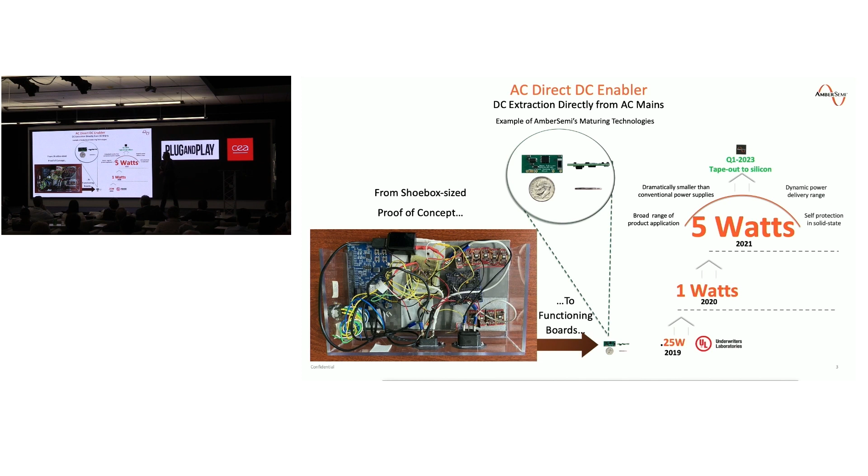And we got UL certification because everybody's asking, is this safe? It was a quarter of a watt initially, then we went to 1 watt, and I kept pushing the envelope, then we're up to 5 watts. Scalable technology—we just taped out, and this is what it looks like now.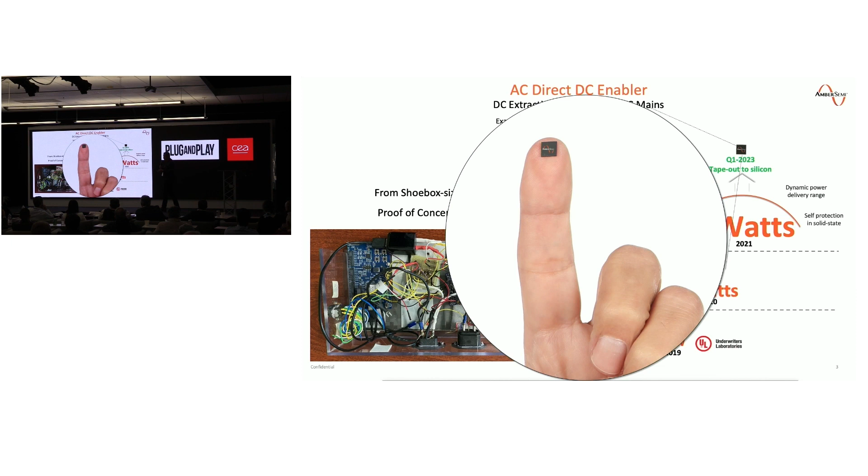That replaces this, okay? There are no organic materials that are just going to dry up. Where's it going to go? All of the general market, all of the appliances and everything else—outlets, switches, circuit breakers, it doesn't matter. It's a power supply. But the semiconductor industry is very interested in pairing this with their microcontrollers.

And by pairing this with their microcontrollers, now you have AC direct microcontroller, AC direct wireless chips, leveraging their MOSFETs and everything else. So I'm going to go there—I wasn't going to go there, but I'm going to go there.

We met with over 100 some companies. We're engaged deeply with many of these companies. Their first reaction, they put their hands on my chest, push me back, and say, you're insulting my intelligence. And rightly so—they're not familiar with this new architecture.

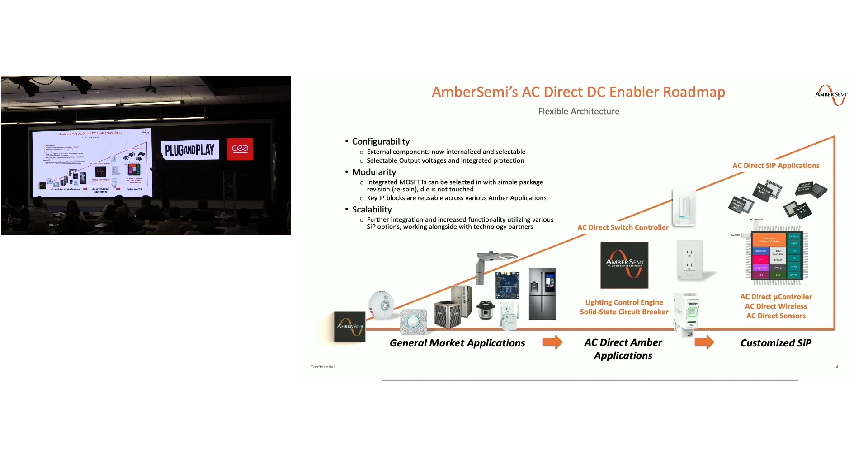Then when we demonstrate the technology—and I brought what I call a Mickey Mouse solution just to demonstrate it, you can see it—basically we brought 110 straight into a tiny board, that board that you saw, 110 AC direct, okay? So what we did now, we said let's leverage this, and let's go to the AC switching.

Look, this is nice. A circuit breaker for a house is very nice, but that's not the low-hanging fruit for me. Data centers, hospitals, refineries, industrial applications, all of these different manufacturing facilities and equipment require circuit breakers in them. Solid state circuit breaker.

We built it. We demonstrated it. We demonstrated with our solid state circuit breaker that we can take 10,000 amps to our board, short circuit, because we have speed and we have intelligence. It's not a theory, we built it. Now we're siliconizing it, and as I mentioned, we taped out.

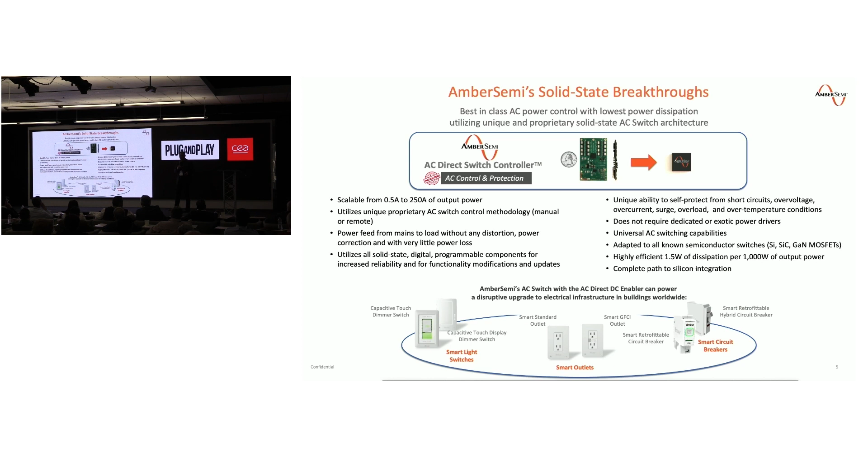So where does this go? Sky's the limit, that's the AC switching. So my first solution was really the housekeeping for this, but I've decided to monetize it. It's endless. And I will be announcing soon that, it seems like everybody's talking about the automotive.

Let's go into the automotive. I'm going to come up with a DC to DC. Let's go from 12 volts all the way down, and 24 and 48 down without step down. We can do it, we did it in AC. That board you saw can take anywhere from 25 volts to 277 volts AC direct. The output, fixed output I have on the first generation, 2 fixed and 1 variable, 1.8 volts all the way up to 24 volts. Now I'm going to scale it all the way down to the DC to DC so I can play in the automotive with you guys.

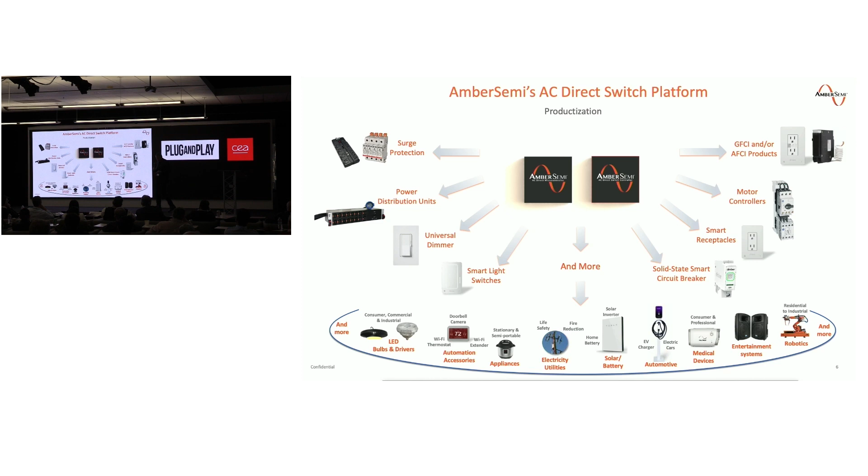So what we built, a circuit breaker, you'll see it over there. We put all the stuff in it. This is not a circuit breaker. When somebody tells me, can you sell this for $10? They have no idea what they're talking about. This is not a $10 circuit breaker. This is a computer. This is going to be the first line of defense for a building, first line of defense of everything. It has surge protection, inductive load protection, it has everything in there.

So this is a computer, what we're bringing relative to the electromechanical switching circuit breaker that we are still using now from the 1950s.

We won last week, we won the Edison Award, 2023 Edison Award. I brought home the gold. We're excited about it. Thank you. Thank you.

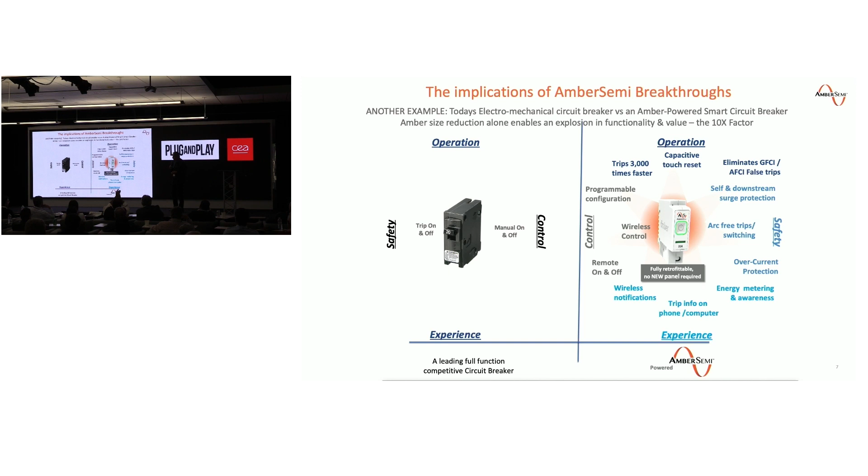So in summary, we built it to demonstrate it so I don't have to teach, okay? Because your inclination typically is you want to go find a whiteboard and you want to teach. You don't want to do that. So you built it to demonstrate it, and we'll go from there.

We've won awards. Those are nice because it will drive PR to us. It drives investors, it drives partners. This is good - 36, now it's 37 granted patents. We got UL, we have done over 33 successful validations across the globe with companies in the $100 billion plus, $1 billion, different companies, different needs, multiple needs actually. And we've entered into MOUs and we've been covered by the press. We've raised over $20 million because I'm a serial entrepreneur. I know how to manage money very, very good. And we did all of this stuff with very little amount of money because I want to build value.

And now for the first time, I'm opening it in this case to the outside world for investments. I think that's it. Yep. Thank you very much.

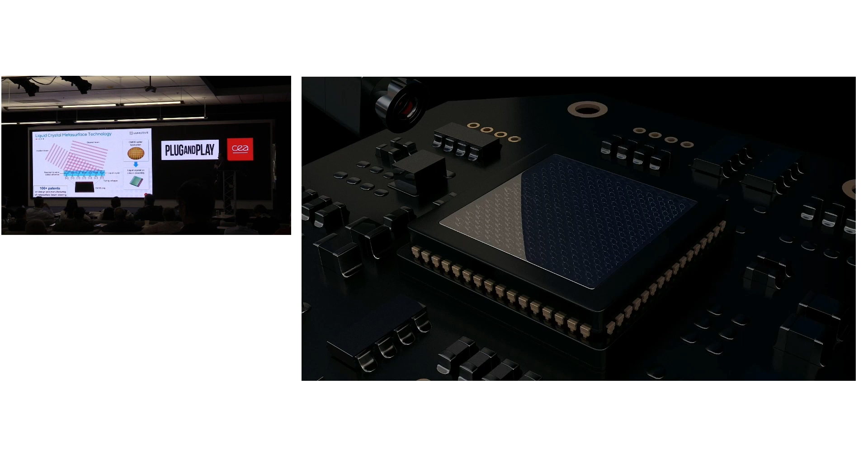Here's a video to look at it a little bit. You can illuminate the LCM with any type of laser you want—it could be VCSEL, edge emitters, or even FMCW. Any collimated light that you get onto it, it will accept, and by modulating that pattern, you're able to steer it. Currently today, we're doing one-dimensional steering.

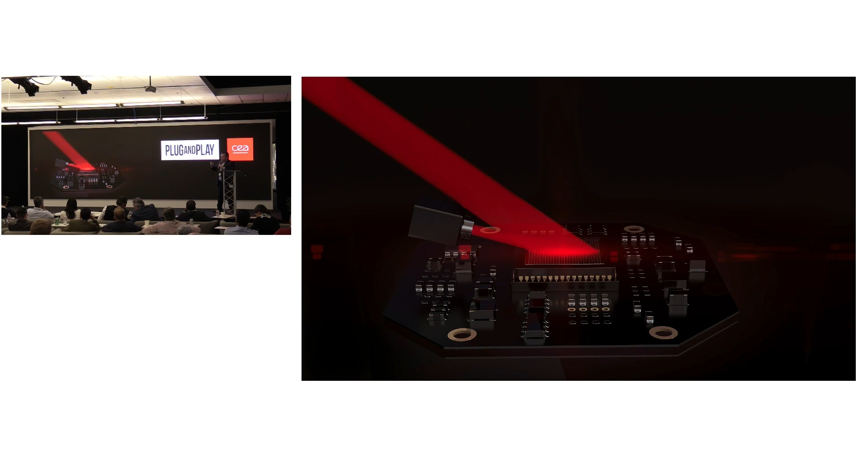We do have a technology roadmap to go to two-dimensional steering. It's showing you right now, and to make the video nice and smooth, it's showing it go in one direction. But one of the real benefits of this is that there are zero moving parts, so you can actually do random access scanning in any pattern that you like. It absolutely does not need to be perfectly linear scanning in one direction at a time.

So what are we doing? We know what LiDAR looks like today—we have what started out as mechanical systems. They're still largely mechanical; even in the MEMS world, one of those M's is mechanical, even though they're very small. So these do mean something is moving in the system.

If you look at the other node of LiDAR sensing, you have flash-based technology or flood illumination, which does extremely well in low cost and short-range applications. What our technology can do is combine the benefits of both worlds into something that can truly deliver scalable cost, size, and performance, with incredibly high levels of integration based on being completely semiconductor-based manufacturing, and most importantly, new levels of software definability.

There's a very common theme we've heard about recently as well—being able to have a sensor where the software application really controls how it behaves, to adapt to the environment, adapt to different conditions, track objects, and be dynamic. Being part of a fluid moving world is really important. It also allows a single sensor design to be applicable to a wide range of different applications and scenarios, which helps drive up volumes and makes LiDAR a much more ubiquitous sensing modality, no matter the application.

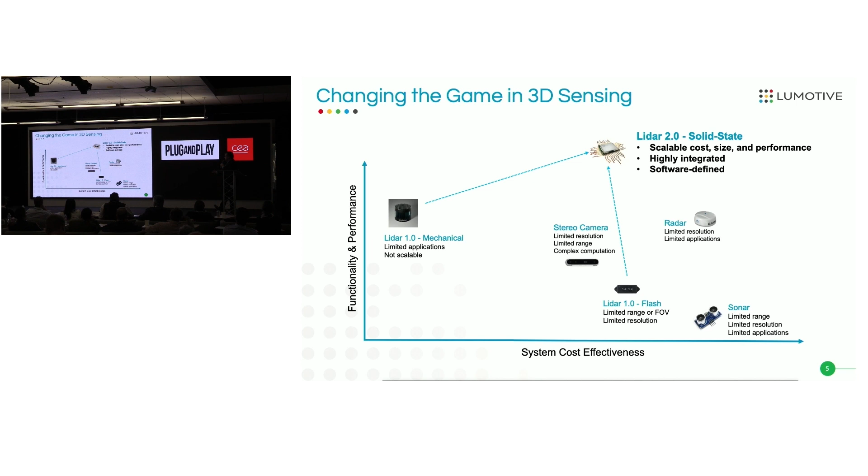So what does this next generation look like architecturally for us? You can see the LCM is a beam steering component accepting the illumination—light goes out and comes back. It's still a time-of-flight based measurement technique; it comes back and is received by a time-of-flight detector. We use a TOF-based architecture for the solutions we're building today, but it's completely compatible with FMCW or any other type of depth sensing measurement technique. The advantage here is this architecture is 100% all semiconductor—there's nothing that's not a semiconductor-based critical component on that system.

There are 0 moving parts, 0 inertia. That kind of helps drive the random access scanning and the ability to not rely on the motion of an object to be able to steer the beam. You can steer the beam anywhere you want, anytime, in any order.

Because of the high level of integration, this constitutes a module that's as simple to integrate as a camera. So rather than being one monolithic solution, which requires lots of different calibrations and complicated assembly techniques to make sure the entire sensor is working, this module comes with very little calibration required, in a form factor you can directly embed into the end product.

Performance is incredibly scalable based on the aperture that you need, the amount of light you can get in there, and your system parameters that you need to design to. This can scale from the longest possible range down to the shortest and most compact design available. So the same technology does apply in all these different domains. And again, software definability is a really critical aspect of this as well.

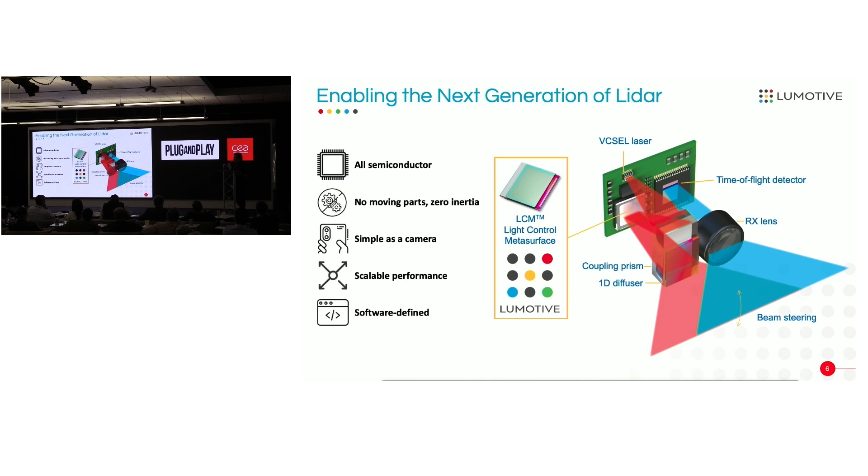So to highlight that scalability, we do have products that can scale into any market and any application where 3D sensing is needed. That can go from the absolute most extreme cases, maybe a defense-based application or long-range automotive, and can scale all the way down to the smallest consumer electronics.

Our shipping products - we do have products shipping now. Volume shipment is this year, in 2023. We have a design win with a major industrial customer that we'll be able to announce in about a month. So these are shipping products that are out there leaving the factory floor this year.

In terms of upcoming products, the next generation for us is even more integration. If you look at what we have right now, these are module-based designs. The next level of integration is to combine the drivers and the control into one monolithic device that can be directly mounted onto the system.

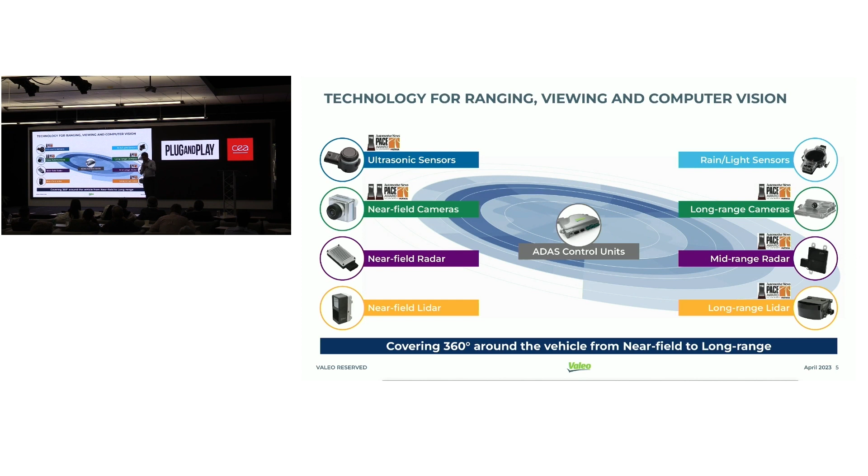The two technologies I want to introduce are the mid-range radar, the well-known 77 gigahertz radar, and of course the LiDAR, which is a growing field by now. So I will make a focus on LiDAR.

We have launched our second generation in '21. We are proud having been the first one to launch an automotive qualified LiDAR in the street. We have announced recently that we will launch our third generation with Stellantis in '24, and that a robotaxi company has selected the Valeo LiDAR. We are very proud about our strong LiDAR position, and our third generation will reach the streets next year.

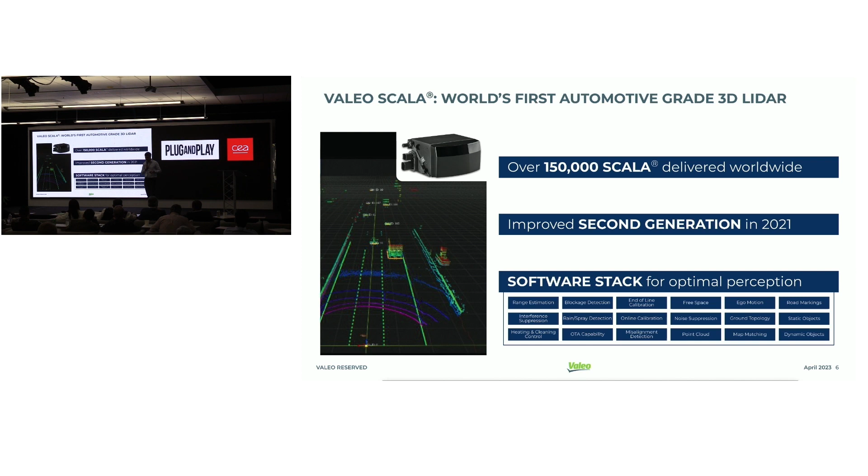Now, I shared about our sensor technology, but once we have all those detections, we need to embed them, we need to fuse them. For that, we are developing a portfolio of ECUs, of control units. The control units that we are bringing to the street are liquid-cooled, and we are making sure that both our software and hardware architecture are able to adapt to the different SoCs that we are developing and using.

As an example, we will have our first SOP with a Qualcomm SoC next year at BMW. This will be a liquid-cooled ECU to support the driving feature level 3 of BMW. We are also a scale-up partner to Texas Instruments, NVIDIA, and Qualcomm, as I said, to embed those SoCs in the vehicles.

So now I spoke about our different components. These are the different components that we use in our portfolio, with the target to bring system and function in the car, system and function in the vehicles. So now when we speak about functions, it means at first we are bringing together all those detections into a fusion map at object level or at raw data level.

We have built different platforms to be able to use the sensors embedded into the vehicle. The first platform is the computer vision platform, to extract objects from our image. Then we have the surround view platform, our second software platform, to deliver visualizations to the driver. Then we have the parking platform, delivering the feature allowing the vehicle to drive itself. And last but not least, the active safety and driving platforms.